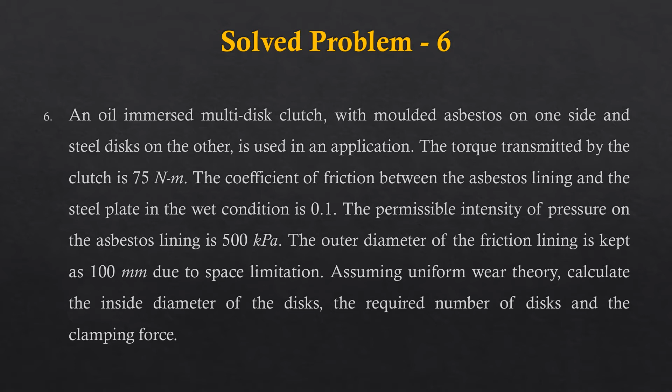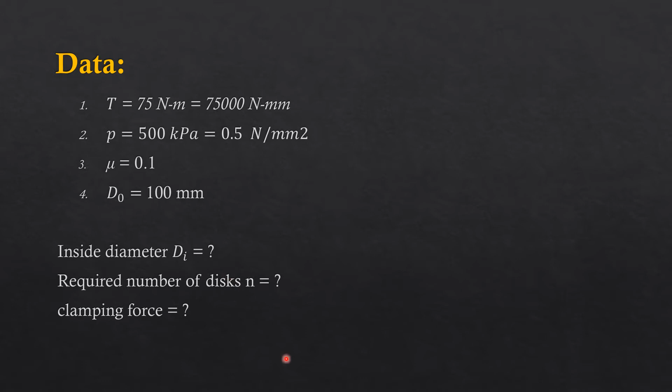Okay, the data is given here. Torque is 75 Newton meter or 75,000 Newton mm. Intensity of pressure is 500 kPa or 0.5 Newton per millimeter square. Coefficient of friction in wet condition is 0.1, and outer diameter is 100 mm. Therefore, they have asked us to calculate inside diameter di, number of plates n, and the clamping force. Right. So let's look into the solution in the next slide.

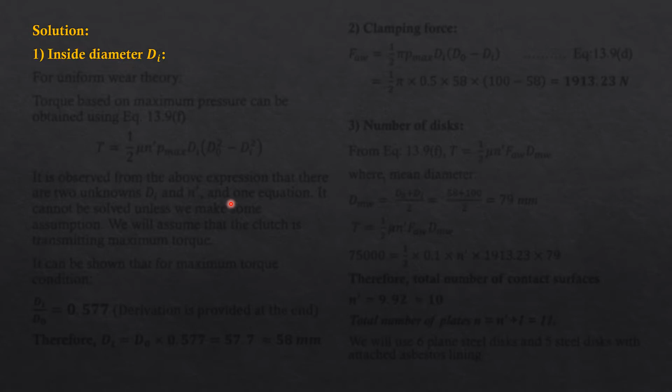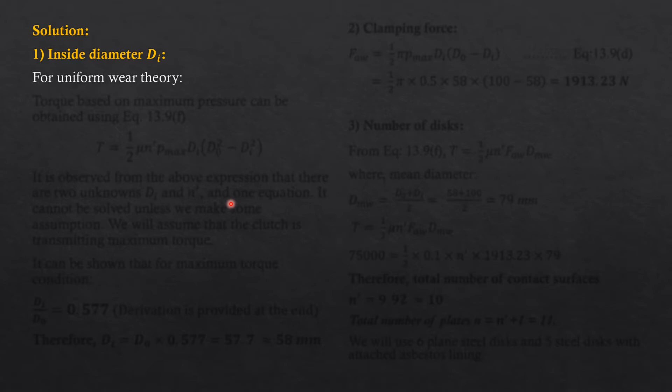All right, so let's look into the solution now. The first thing that they have asked us to calculate is the inside diameter di. They have asked us to assume uniform wear theory to solve the problem, to design the clutch. Okay, now to calculate the inside diameter, we can make use of the torque equation, right? And they have specified that the torque needed in this application is 75,000 Newton mm. Therefore, the torque is known to us. Therefore, for uniform wear theory, we can make use of equation 13.9F for the torque, right? And since we know the value of torque, you can try and calculate for di.

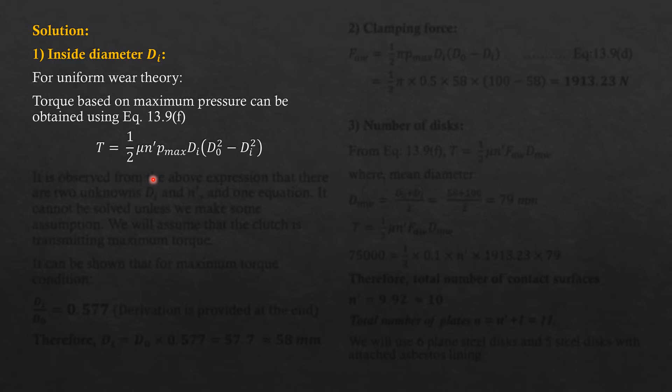But then there is a problem here. In this equation, we do not know n dash also. The number of contact surfaces is also unknown. Therefore, there are two unknowns here. Therefore, we will not be able to use this equation as it is, right? Therefore, how do we proceed further? Now, in this case, you will have to make an assumption here. Since we have two unknowns di and n dash, we cannot use this equation as it is. We will assume that the clutch is transmitting maximum torque. That is, the torque of 75,000 is the maximum torque.

Okay, now it can be shown from theory that for uniform wear theory, the ratio of inside to outside diameter of the clutch disc is equal to 0.577. It can be proved. It can be shown that di by do is equal to 0.577. Okay, and this proof or this derivation is provided at the end of this video. We will see that at the end of this video. As of now, assume that di by do is equal to 0.577. Now this is available in some of the handbooks, but unfortunately for our handbook, it's not specified, right? Therefore, you will have to remember this.

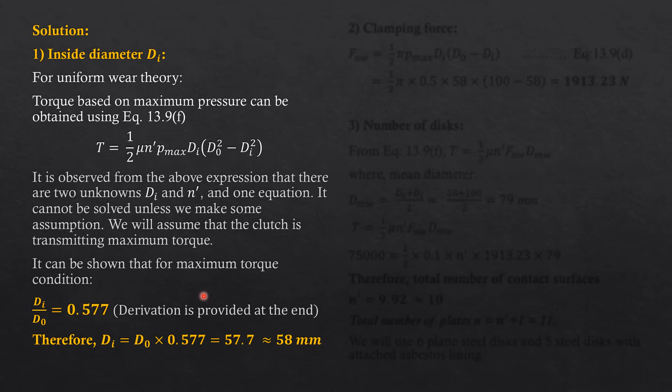Okay, for maximum torque condition, the ratio of inside to outside diameter of the clutch plate is equal to 0.577. Right now, 0.577 is actually root of 1 by 3. Okay, so either way you can remember it. Right now, if you make this assumption, then we can directly calculate the inside diameter di using this relation itself. Okay, therefore, di will be do into 0.577. That turns out to be 58 mm. Right, therefore, you have directly obtained the inside diameter di as 58 mm by assuming that the torque is maximum. The specified torque is maximum torque, or the clutch plate is operating at maximum torque.

All right, okay. Now, the second factor which they have asked us to calculate is the clamping force or the axial force, the spring force. Okay, and for this we know, for uniform wear theory, you have the standard equation for axial force, FAW, equation 13.9D. Substitute the factors and you will get it as 1913.23 Newton.

Right, therefore you can directly calculate the axial force. The third factor that they have asked us to calculate is the number of discs. Now to find out the number of discs, we will first calculate the number of contacting surfaces n', and based on n' we can decide the number of plates n.

Now the torque we know, therefore from equation 13.9F we have the torque equation, right? And the torque value we know. And for uniform wear theory, the mean diameter is the average of inside and outside diameter, and that turns out to be 79 mm. Okay. Now substitute in the torque equation.

The torque we know is 75,000, and you know all other factors but n'. Solve for n'. Therefore, the total number of friction surfaces or contact surfaces n' turns out to be 9.92, or approximately 10. Now, we know that the total number of plates is equal to number of friction surfaces plus 1. We have seen this in that figure in video number 4.

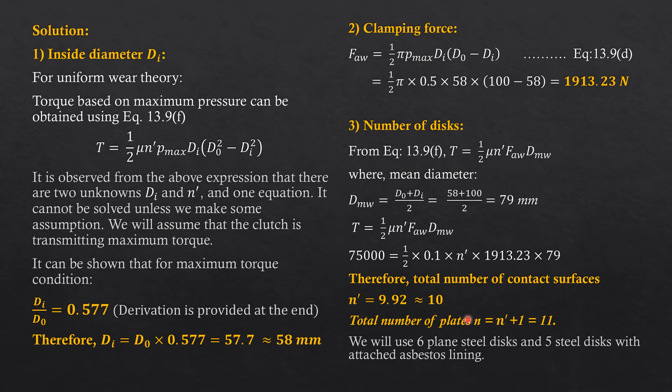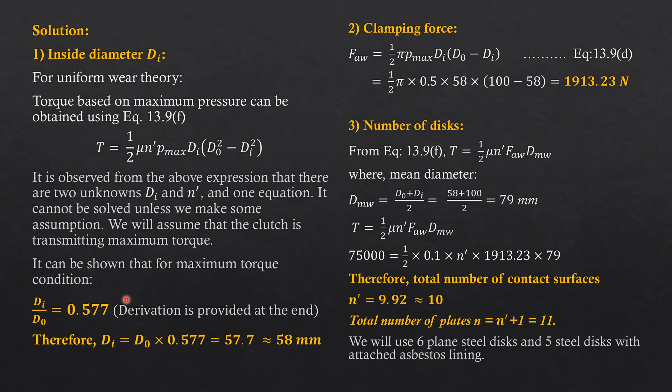Now, in the next slide, we will look into the derivation of d/D equal to 0.577. The proof for that I've taken from the Bhandari book and represented it here. Let's go through it. So let's try to prove that the ratio of inner to outer diameter is equal to 0.577. To prove this, we will begin by assuming the ratio d/D. Small letter d is the inside diameter, capital letter D is the outer diameter. We will assume d/D equal to x.

For uniform wear theory, you have the equation for torque as equation B here. This is the same equation you have in your handbook, given as 13.9F. Now, if I substitute d/D as x, that is, if I take capital D outside this bracket, then you will have the ratio d/D here, and this equation will now turn to x(1 - x²). Therefore, this is the way the equation will change.

Now in this formula, p_a, D and mu are all fixed values, right? Therefore, this is a constant value, and what varies is the ratio d/D. Now, for the torque Mt to be maximum, we know that the slope of this equation, or its derivative, should be equal to 0. Therefore, the derivative of the varying factor x(1 - x²) is equal to 0.

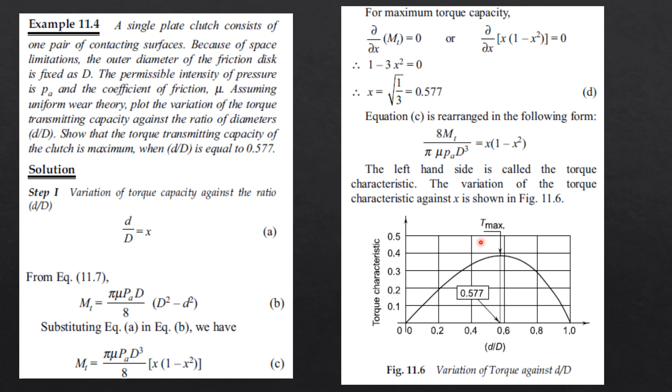Therefore, while designing a clutch plate, it is always good practice to keep the ratio of outer to inner diameter between 1.5 and 2. So with this, we end the problems on design of clutches. This will be followed by an assignment and quiz.